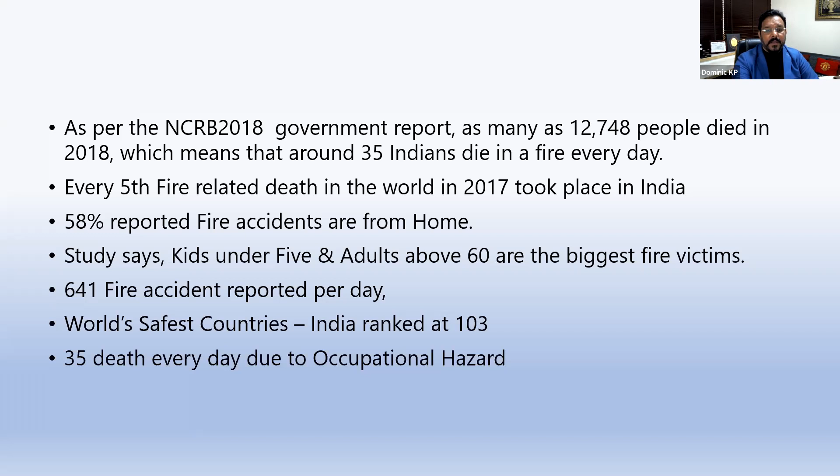If you see National Building Code 2016, Part 4, which talks about fire prevention, life safety, fire protection, it covers the requirement of fire prevention and life safety in relation to fire and fire protection of buildings. The code specifies occupancy-wise classification, construction aspects, egress requirements, and protection features necessary to minimize danger to life and property from fire. It specifies demarcations of fire zones, restrictions on construction of buildings in each fire zone, classifications of buildings based on occupancy, types of building construction according to fire resistance of the structure and non-structural components, and other restrictions and requirements necessary to minimize danger to life from fire, smoke, fumes, or panic before the building can be evacuated.

So today's subject is the importance of fire safety, passive fire protection. Unlike active types, passive fire protection systems never seek to extinguish the blaze. Instead, the passive fire protection role is to contain the fire to its point of origin and prevent the flame and smoke from spreading throughout the building. The National Building Code 2016 highlighted the use of and need for passive fire systems in buildings and structures.

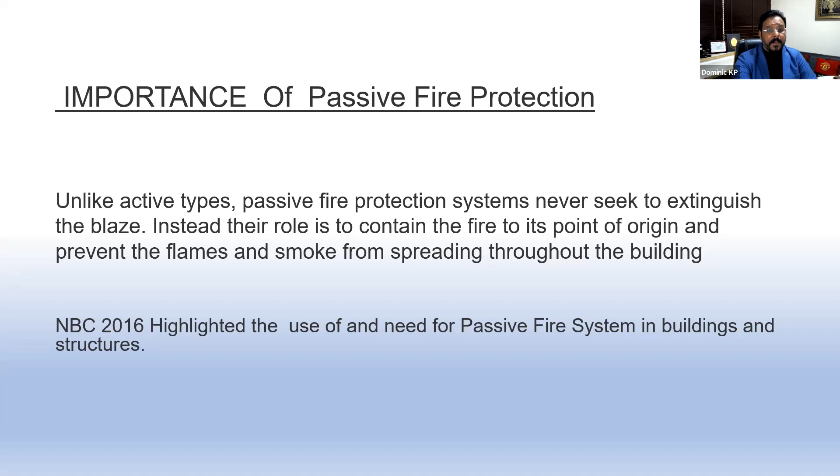As I said in the beginning, the topic for the day is Facades: implementing fire safety and performance on projects. This is presented by our good friend, an authority on the subject, Abhishek Chabra. Abhishek joined Thomas Bell Wright in 2013 and has been the driving force behind the expansion of fire compliance activities. He has been advocating the need for compliance to standards for improved safety and quality across industry for most of his 18 years of experience. He has vast experience of how conformity is realized across the supply chain of several industries, including consumer electronics, industrial, renewable, and building products. He has been writing various articles and presenting at various forums about how mandatory and voluntary quality and safety compliance are realized.

He also drives a blog and a LinkedIn group called Gurus of Testing, Inspection and Certification, www.tic.guru, aimed at expanding an understanding of conformity across the world. He is a member of IAS Technical Advisory Laboratory of UAE and also a code contributor for UAE Fire and Life Safety. Ladies and gentlemen, we have a very esteemed speaker with vast experience in writing codes and also ensuring compliance is made or met. I welcome Abhishek Chabra to speak on the subject, which is very passionate to him. Over to Abhishek.

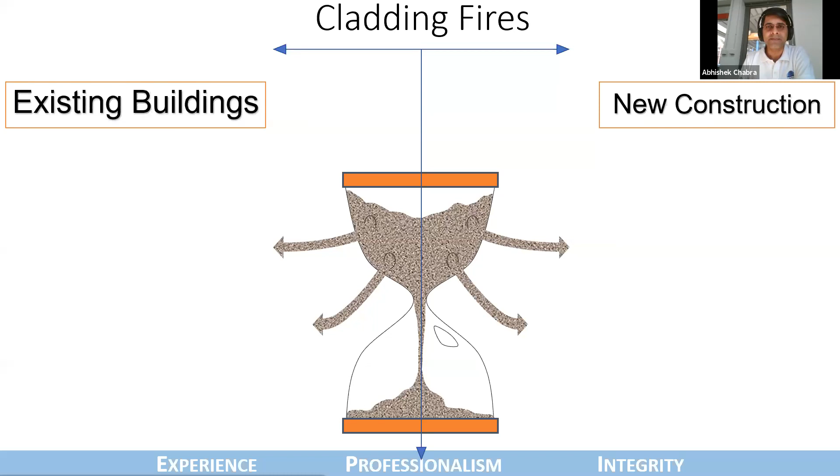So I'll give you a brief overview of how we as a company, and myself, contributed to this in many ways. I'll start by explaining that the NFPA, the National Fire Protection Association from the United States, has a research foundation that came up with a very interesting tool.

They wanted to develop a risk assessment tool that allows anyone in the whole world to assess the risk of their building. Anybody, from a facility manager to a building owner to an authority having jurisdiction, can use this free tool from the internet, input data about their building, and arrive at a risk rating with respect to facade fires. This tool, called the Effect tool, was developed by a company called Arup, supported by Jensen Hughes from the United States, as well as Thomas Bell Wright, who was the technical advisor for fire testing. We contributed massively to helping develop this tool, which is being used worldwide today, from the United States to Europe to the Middle East to Australia.

We also did a lot of work supporting authorities around us. We supported the development of the new revision of the UAE Fire and Life Safety Code of Practice, which brings together a very good set of requirements for several different facade types and cladding materials, an approach that has been lauded by Europe, the US, and people around the world.

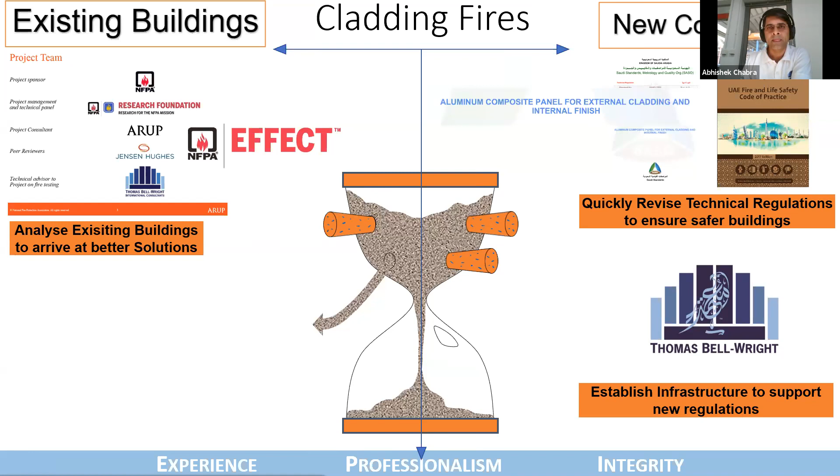For existing buildings, we went ahead and undertook a large R&D project. There is a company fairly well known in the world called Johnson Controls. They developed an extremely innovative, state-of-the-art solution to tackle the problem of fires on existing buildings - a system that proactively detects a fire on the exterior surface of a building and automatically uses an active fire suppression system to bring the fire under control.

People close to the subject of ACP fires or big facade fires know it is difficult for fire tenders and people trying to control a fire to reach the site, as the fire often engulfs buildings very quickly.

So in our laboratory, we built a 25 by 35 meter wall and added a range of combustible cladding material on it. As you can see on a small video snippet, this active fire suppression system is able to control these fires. We were very pivotal in helping Johnson Controls finalize their product, demonstrate and make it functional, and showcase to the whole world how this system works very well.

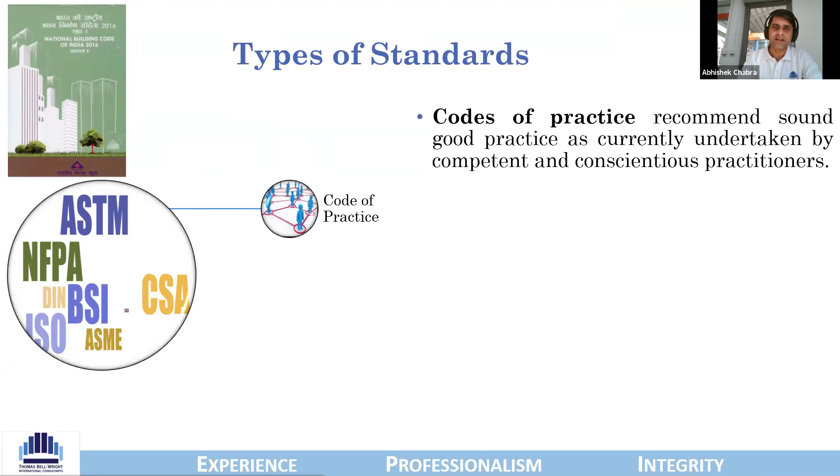How are these implemented across the world? We use another kind of standard called a method. An example is NFPA 285, published by the National Fire Protection Association, a standard test method for testing fire propagation characteristics of cladding materials. What are methods? These are highly prescriptive documents. They set out an agreed way of measuring, testing, or specifying what is reliably repeatable. The key word for test methods is repeatability. Unlike codes of practice, test methods have a prime goal of ensuring repeatability - a product brought to a laboratory, a specification written in a contract will trigger repeatability irrespective of the circumstances under which the test is done.

I then move to what is called guides. Some of you may have heard of ISO 17025, a standard used for setting the general requirements of competence for testing and calibration laboratories. These guides are published to give minimalistic, not very prescriptive advice which reflects current thinking and practice on how to do this effectively. As an example, ISO 17025 lays down minimum guideline methodologies, advising laboratories how to ensure that the tests conducted are repeatable or not.

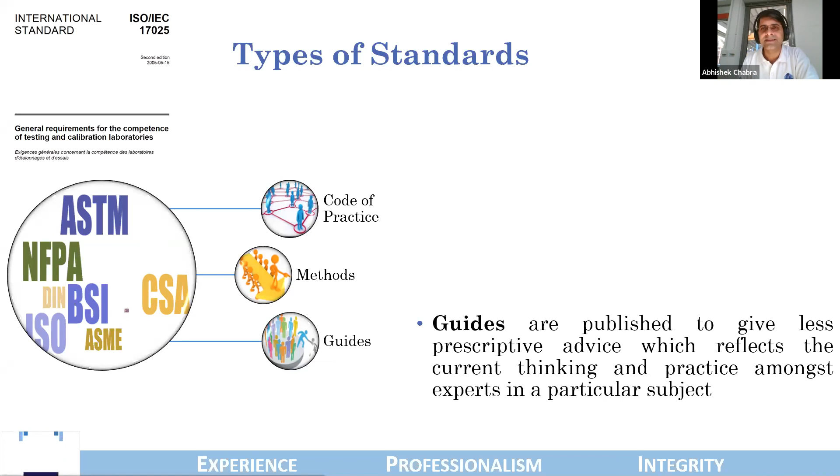With this as background, I'm sure you have a much better understanding of the intent and use of codes, methods, and guides. Let's look at the problem at hand: facade fires. I'm sure a lot of you have studied, read, and may already be aware of a good background of why these facade fires have been happening.

I'll give you a background again, just for the purpose of revision. Many decades ago, construction for what was called high-rise buildings, maybe 60, 70 years ago, was done using thick load-bearing walls. The floors were laid with support of these thick load-bearing walls, which ended up performing lots of functions. They not only supported the load of the floors but also acted as very good barriers between the outside and inside world. They provided thermal gaps, thermal breaks, weather resistance, water resistance, and even building movement. In that era, these thick walls were acoustically very good as well. If you've been to some really old buildings, forts, or palaces, you'd notice the interiors are often very cool, very contained, away from the outside world.

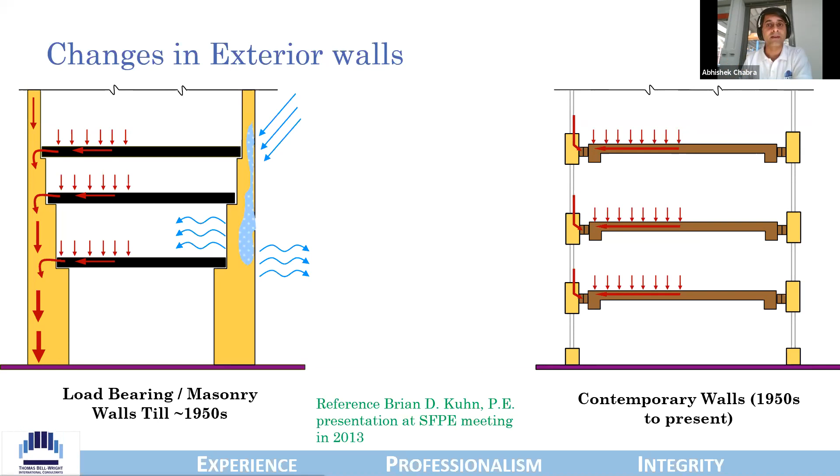But what were the functions of the big, thick load-bearing walls? These functions eventually got divided. Now designers, architects, engineers had to come up with a system that fulfilled all these functions, which were originally taken care of by one thick element. How do we fulfill all of these functions when we want to be fast, quick, and very cost effective?

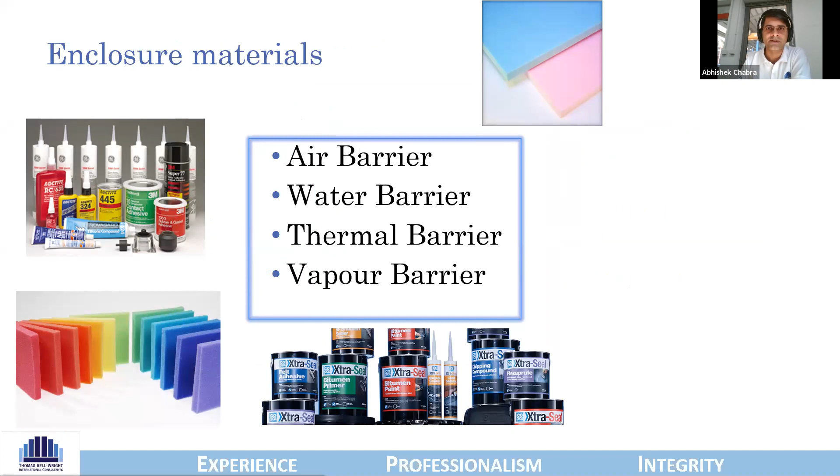Well, R&D, manufacturing facilities around the world, and the World Trade Organization allowed the supply chains to open up. Our country opened in 1993, and so many materials from all over the world could come in. Designers, subcontractors, facade consultants had the freedom to bring in materials from different parts and design and engineer a system that will fulfill the requirements of those thick load-bearing walls. Now there is flexibility, and you can almost engineer a specific solution with the help of materials from different places. Where is the risk then?

Well, the risk is very evident in the world we live in. What we see on our phones, in brochures, in advertisements - is this what you get? How often is this a real problem? What you see in front of you, as simple as going and buying paint, which when painted in your house, you say, well, maybe this is not how it was.

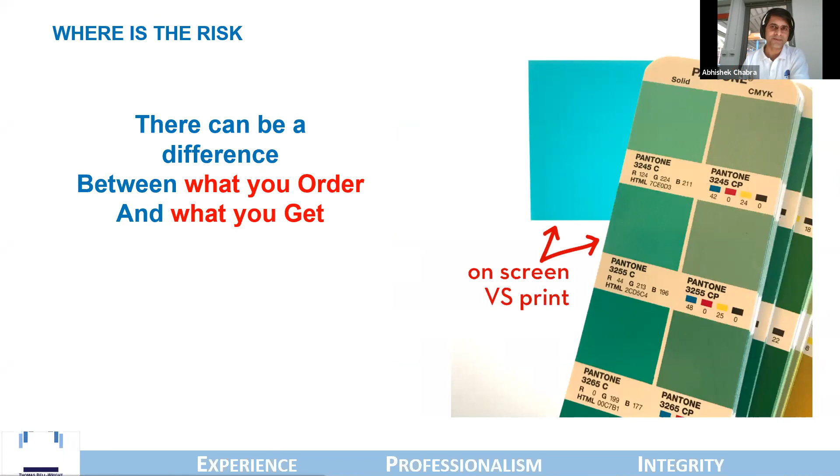So I want to check from you - I don't know how many of you have experienced something like this, where you order something and what you get is something else. In today's world, where a lot of shopping happens online through e-tailers, we buy things, and when they reach us, they might not necessarily look, feel, and perform the way they were supposed to.

This problem is dealt with very effectively in many types of consumer products, which you are probably very familiar with. So let me quickly open a small poll question to take your opinion on how you see and think these situations are handled.

Have any of you witnessed a product recall? I remember when I was in India many years ago, Nokia batteries were recalled, and it was probably one of the biggest product recalls I had witnessed in my life. What is the situation with you? I would love to hear.

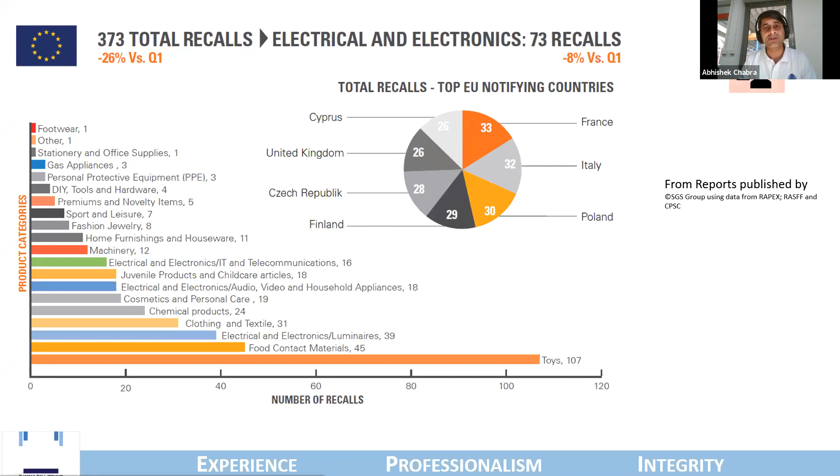So, as a lot of you understand product recalls, you have returned products, you know how product recalls really work. But how exactly does this concept of product recall work in the construction industry? I don't know if you have ever wondered or come to a situation where you realized the building that was constructed has some materials, some components, which have not only been procured but also installed. What do you do now? How does the government help? Does the government help? Who can help?

Very sadly, the repercussions are very bad and often outside the control of the stakeholders, if you are procuring, buying, or renting an office. The people who were involved in designing and constructing the office are very far away. Accidents, damages, fires, claims, fines, reputation damage - the list is extremely long.

I would not delve a lot into this, we are familiar with this. There are people from the insurance industry who are also listening in, and many of you are aware of these repercussions. Today I'm going to talk about some simple and very easily implementable methodologies - things that once you learn, you can ensure that as a stakeholder, fire safety issues and potential damages in existing or new buildings do not happen.

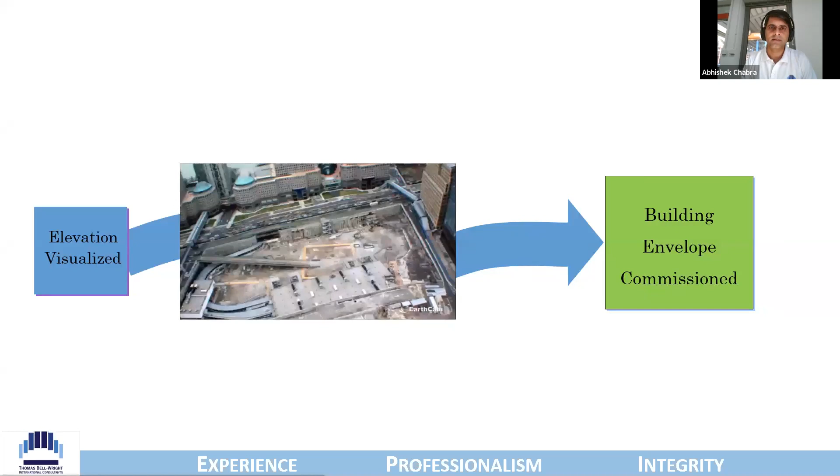So let's talk about 4 very key steps that are undertaken from the time that the elevation gets visualized in the office of an architect till the time that the building envelope is actually fully commissioned.

It starts with selection of materials, and a key part of selection of materials is to know, write, and ensure what are the fire properties of materials that will be used to design a facade system or a cladding system. And this takes me to a very important aspect, often known in some circles - what is the resultant property of a facade system.

The property of a material behavior and a system behavior is often very different. When 15 different materials are brought together in a defined configuration, their system behavior as a whole is often very different from the constituent elements.

How they would behave when it comes to fire is something that needs to be tested and validated - tests which check how the reaction to fire behavior of one material interacts with the reaction to fire property of the material adjacent to it. Is there a material that may take a very short time to ignite quickly, may not have enough energy to burn, but just enough to ignite the adjacent material, which was very difficult to ignite, had a high ignition temperature, came across as very safe? But when the second material gets ignited, there is potentially a catastrophe that can happen.

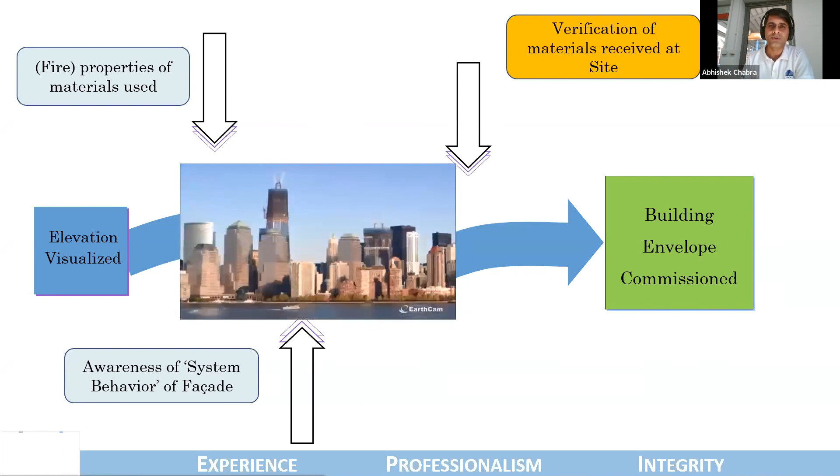So not only do you need to validate the design and behavior of the cumulative system, you need to check and ensure what materials are being delivered to the construction site. You could have chosen great material, you could have done a good validation of design, but wait a minute - what is happening at the construction site?

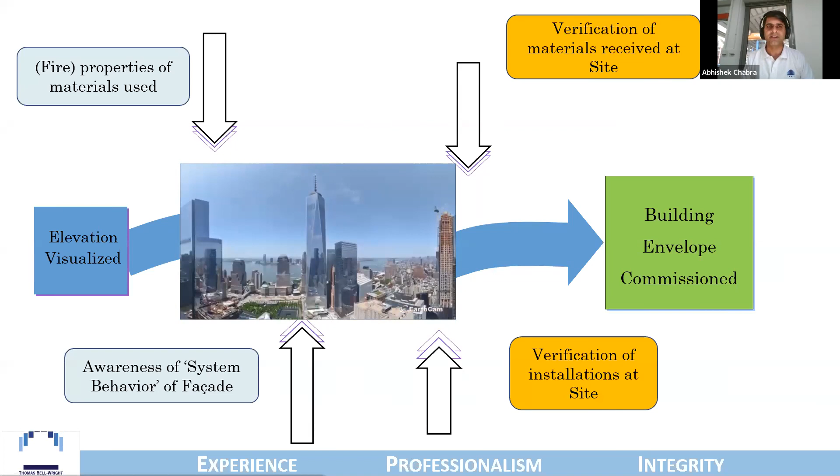How do you check and ensure that the materials are the same as they were declared to be in the first place? And once you do get assurance of these materials, you need a very stringent watch on ensuring that the materials that came in are getting installed in the same way as the approved system - the design which was validated, and lots and lots of money was spent to ensure that this validation is in place. So let's start with the building blocks.

A lot of you would have seen test reports, and probably already rely heavily on a manufacturer submitting a test report saying my product is fire safe. I'm going to talk a little more about what this fire safe can potentially mean. What is fire resistance? What is retardant? Ignitability? There are so many properties that often get thrown around based on what - fire test reports.

What are these fire test reports? And the most important part - how do you establish a link between a test report that is submitted as part of, let's say, a project submittal or a brochure, and how that links with the material that eventually reaches the site in a packaged container?

How many tests were done before getting that test report that was given to you and submitted? How were these tests done? In what kind of laboratory? Were there several failures behind it? Was the laboratory capable of doing these tests? How do you validate this laboratory? And my favorite question, so many people ask me this: Abhishek, I have a test report and it is valid for 3 years, and it is the 4th year today - can I still use this test report?

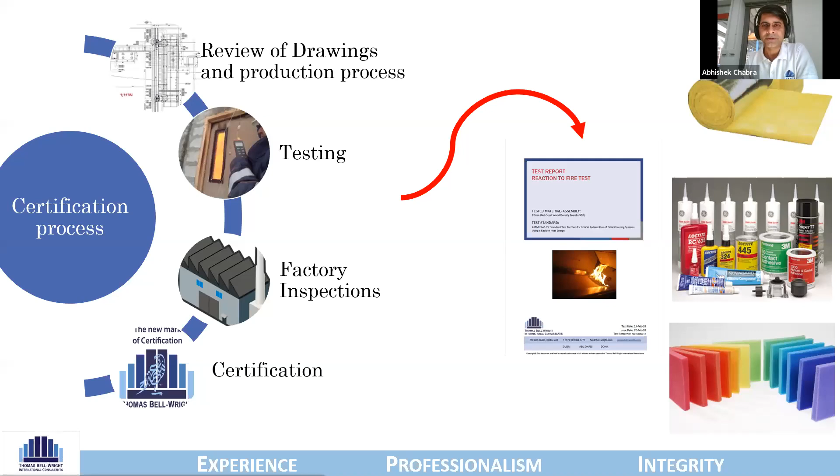And hence, such manufacturers will put not only the certification mark of a third-party certification body, they will give you a certification number, which you as a buyer, specifier, or approver can actually validate. You can go online to the certification body's website, punch in either the name, the number, or the test method of the product, and verify if the certificate is valid, where it was issued from, and what test methods the products comply to. These listings capture a lot of details for buyers, specifiers, insurers, contractors, and consultants to validate all these properties.

As an example, you see a fire door, which gets tested for fire resistance. The certificate and the listing document will give you enough and more evidence to check at the construction site whether this is the same product which was printed in the brochure or submitted as part of the specification document.

And this brings me to a subject very related to facade systems and materials, which is the key difference between a product test and a system test. What is a product test? A product test is a test of reaction to fire properties or any properties of how a product, for example insulation material, ACP, cladding material, rock wool, foams, sealants, behaves. There are a plethora of items or materials which have their independent material properties.

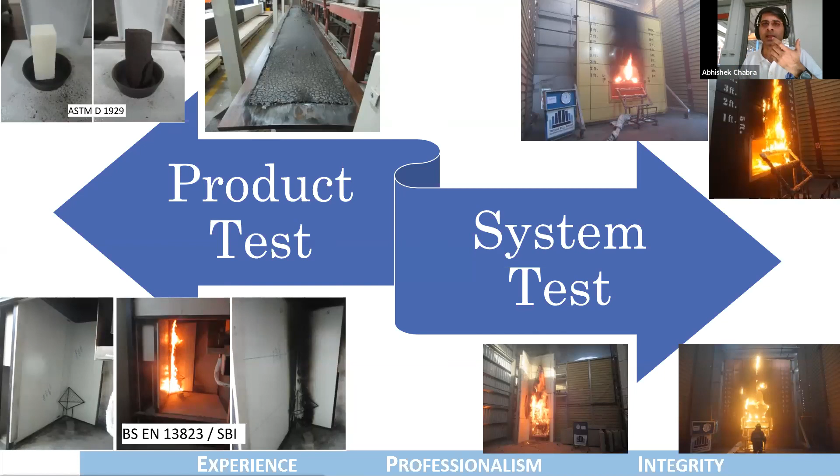When they are brought together with defined dimensions, thicknesses, and sometimes air gaps as well. Let me quickly show you that when you see these certificates submitted to you as part of submission documents, how do you really validate these certificates? I'll show you with an example that you can see on your screen.

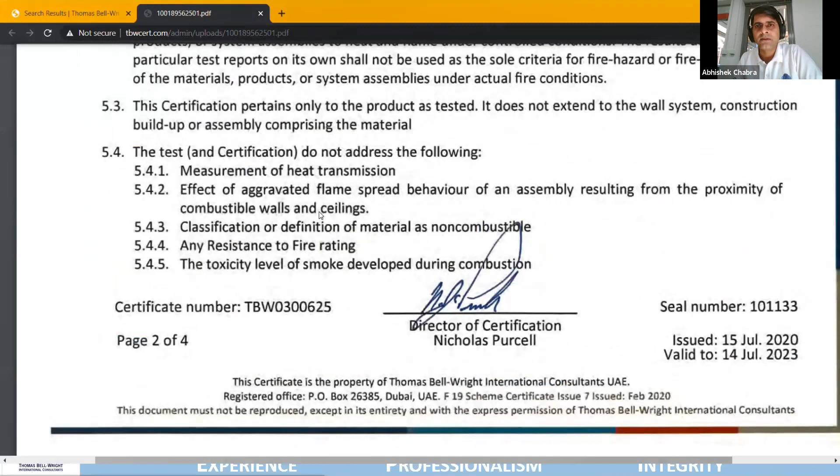This is an example of a certificate issued to an aluminum composite manufacturer in India. You probably are familiar with the name of this company. On the screen you would see this certificate, which all of you can look up on the certification directory of our company, www.tbwcert.com. This certification directory details a lot of information which you can use not only to verify that the specifications you are using are correct, but also the address from which this certificate is coming.

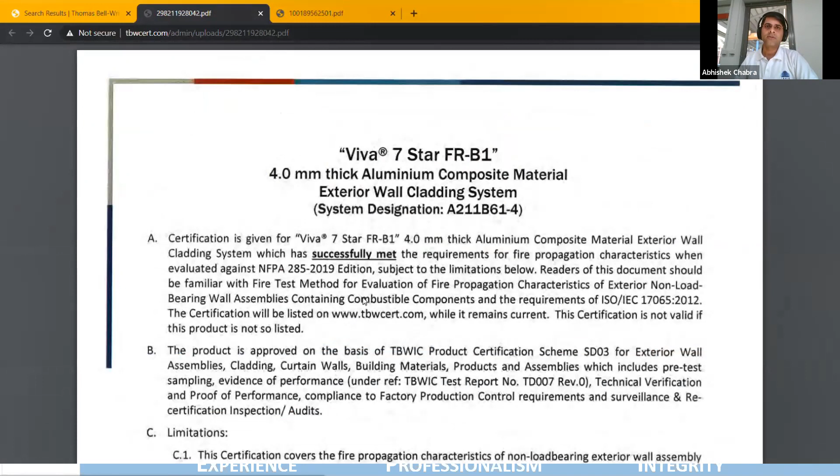And here you now see the listing of a system test, like the NFPA 285, which I will detail later. Such a system test listing will have a lot of information defining the design of the system. It will list down all the other components of other manufacturers, how they were brought together, what were the details of the design, what were the air gaps that you see.

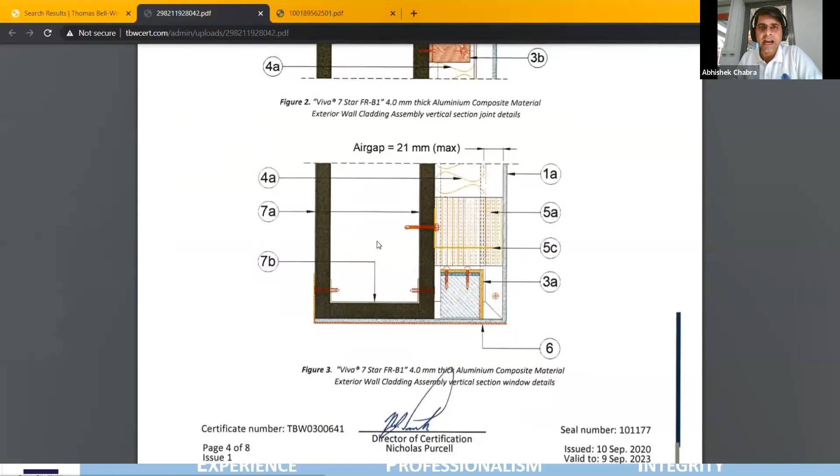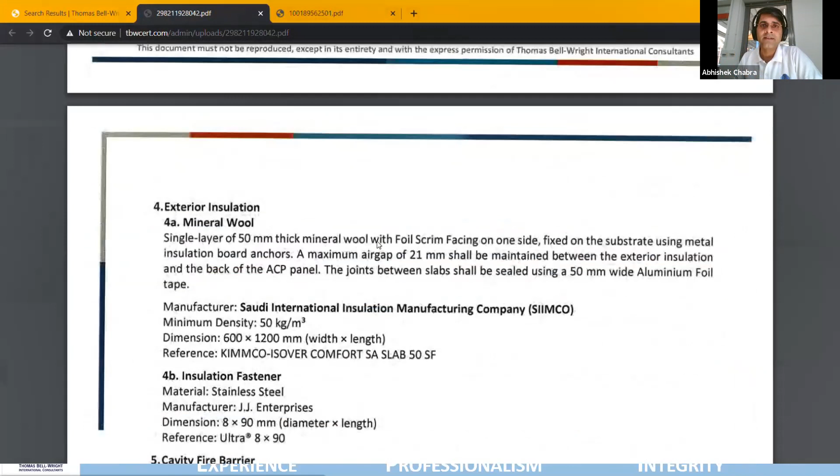And all this information is extremely important for you as someone who is designing another system for a building which you will be using. You could be validating the submission of a product manufacturer who claims that his material is fire safe.

It is very, very important to know that if a given material manufacturer, like an aluminum composite panel manufacturer, has done a large scale test to prove or to have evidence that his, let's say, ACP will not go up in flames like some of the videos that you may have seen, this is the test.

Well, yes and no, because you need to know and understand how that aluminum composite panel was designed into a solution and installed. Were there lots of other design features to ensure that the oxygen gets limited to the fire that can potentially grow? What were the air gaps? What were the fire breaks? There are a large number of design elements to ensure that the system behaves in a given way.

From the hundreds of large-scale fire propagation tests that we have done in our laboratory over the years, we have seen materials which could be classified as per the European norms as class B1, even B2, have actually complied with a large-scale fire propagation test. And on the other hand, we have seen materials often referred to as per a classification method as A2, in terms of limited combustibility, could be part of a cladding system that actually catches a big fire.

Let me take you all to our laboratory here in Dubai and show you with the help of a quick video how these large scale fire propagation tests look. You can see on your screen this large 25 by 35 meter wall that I was talking about in some of the initial slides.

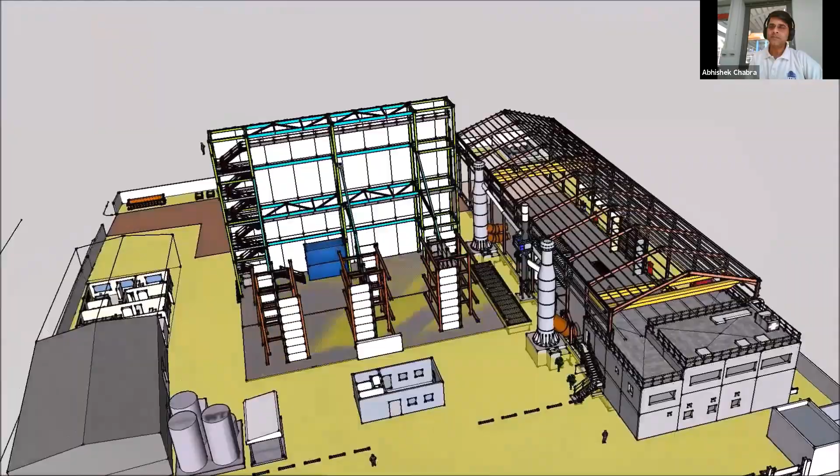I will shift to SketchUp because our drone photographer did not get the license to do a lot of drone photography, but I will switch to SketchUp to show you our laboratory where we do these tests. On your screen, as the video moves, you can see the place where we do these large scale fire propagation tests.

On your left, you see the test rigs as per the British standard, the BS 8414, the test method that has been talked about a lot through the course of the Grenfell investigation.

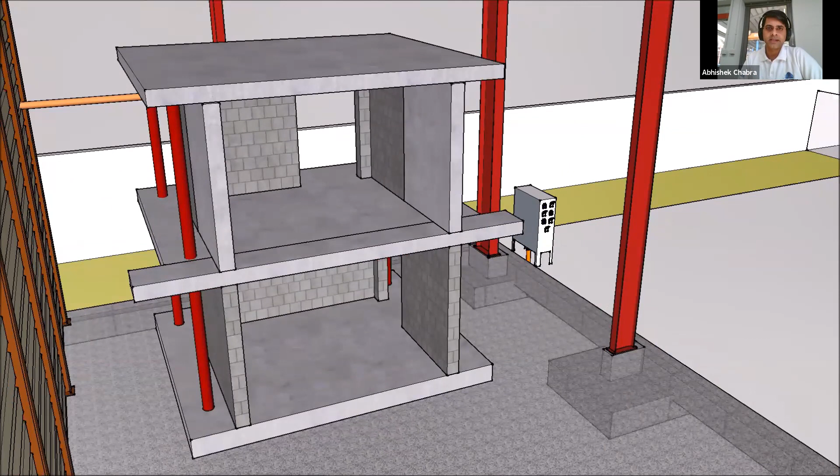Here at the center of your screen, you see the test rig used to conduct the large scale fire propagation tests as per the American standard, the NFPA 285, also called ISMA, the intermediate scale multi-story test apparatus. Let's look at how these tests are performed.

A subcontractor will come in and build a mock-up replicating the design of the project, exactly replicating how the exterior facade material, like the ACP, my favorite example, and insulation material, fire breaks, gaps, supporting installation material like gaskets and fasteners. What are the types of fasteners? What are the air gaps? All these details are replicated.

The NFPA 285 test goes to great lengths to explain that the joints, which can come between, let's say, two aluminum composite panels, should be above the window header. The window header is a place which, as you can see on the screen, replicates a window that is either in an existing building or a window that can develop in case there is a building fire.

You could have a situation where you don't have any windows in a high-rise tower, but due to a fire that has broken out, due to the hot gases, you could have a break, a place where hot gases burst out and create the often discussed leapfrog effect. What the window burner does is replicate how the leapfrog effect, or how the escaping hot gases or fire, will interact with the whole buildup of the facade.

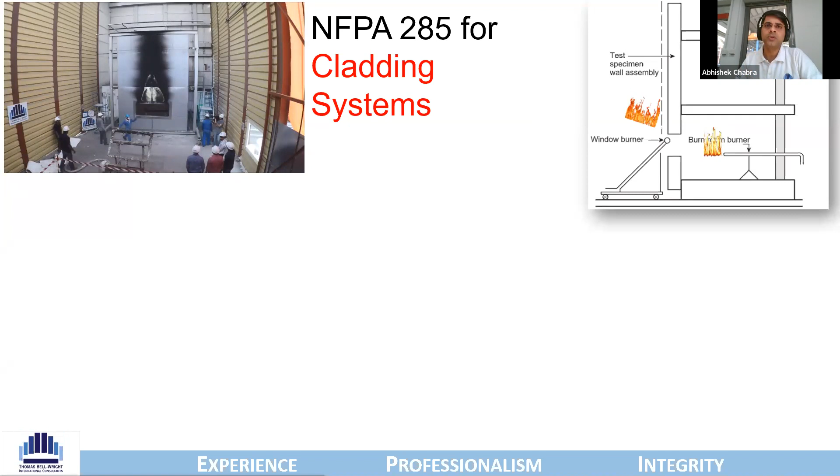These gases would go in between the air gaps as well as attack the exterior face of the system. Hence, only a given design, one specific configuration, gets tested and validated through this large-scale fire propagation test.

You have an L-shaped window, which means you have an L-shaped mock-up, which means there is a reflection of heat and flux that comes across because of how the fire can potentially grow. The British 8414 test is done in two configurations, part 1 and part 2, depending on the type of subframe and structure. Of course, this is a subject which I love, and I can probably speak for an extremely long time.

Detailing how these large-scale fire propagation tests replicate only a given set of situations or scenarios of a project. This is where, as I said, we need to go back and assess and ensure that a given building could have so many different types of drawings and designs. So let us understand, with this overview, how you can help.

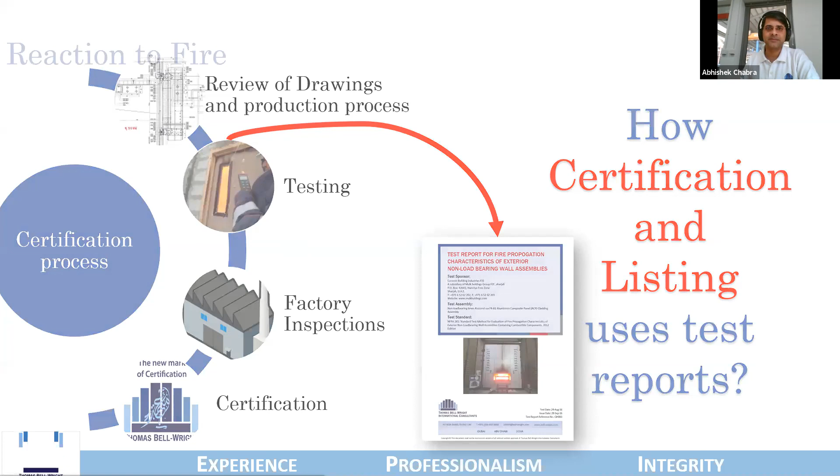What are these tests? For facade materials, the 4 key properties of reaction to fire must be kept in mind when choosing materials that will come together, behave, and perform as a system bringing about all those properties that a thick load-bearing wall used to provide 60, 70 years ago, and probably much more.

First is ignitability. We all know things catch fire, lots of things catch fire. But what is the temperature, what is the environment in which a material will catch fire? And this may not always be very, very risky.

If you imagine around your table, you can see paper and maybe a plastic bottle. You will be sure to answer that paper will catch fire more quickly than plastic, which means plastic and paper have different ignitabilities. But are both of them equally unsafe? A small piece of paper could burn very quickly and go away, but a similar size plastic material, depending on the type, could take a little longer to catch fire.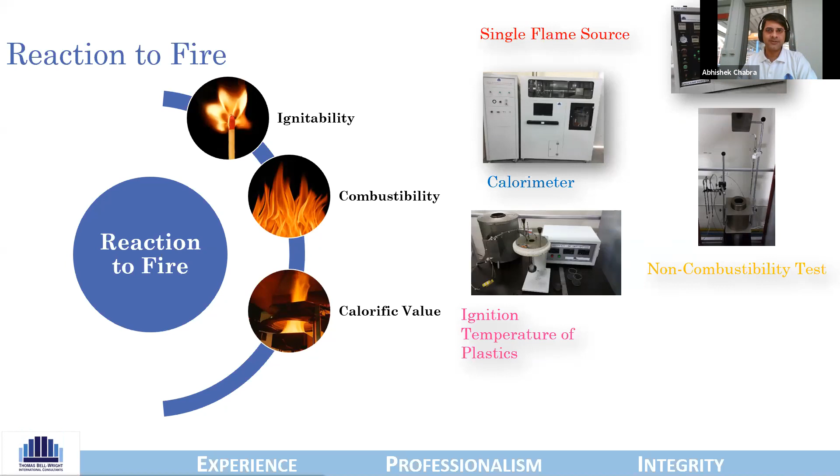The calorific value, very simply put, as we all know in India, whoever is eating sweets like I am, I love to eat sweets, the season is coming. Whatever has more sugar, whatever has more calories, is probably more harmful, right? So there are some building materials which have a higher calorific value, meaning these materials have more to burn.

How does this relate to materials we use in an everyday scenario? The amount of these high calorific value components as part of the material will define how quickly a flame will spread across it. Simply put, easy to remember: how much sugar does your burfi have? It means how much sugar, and how the subcomponents or chemicals with the capability to burn higher, are spread across the material.

This will define the behavior of the building material, whether you're talking of a board, a magnesium board or gypsum board, or an aluminum composite panel with a core material unique to each manufacturer's chemical formula. What is the calorific value? What is the combustibility? What is the flame spread? Whether this catches fire quickly or not.

The industry and manufacturers will often throw you an extremely large number of data points. The European norms, in my opinion, having done so many tests as per American, British, and European standards, has evolved a very effective classification method, also used in the UAE Fire and Life Safety Code of Practice, and the code Saudi Arabian Standard Organization has published for ACP. This classification method classifies material, as you can see on your screen, as non-combustible or nearly combustible, A1, A2, and then from B to F, classifying how quickly materials can catch fire.

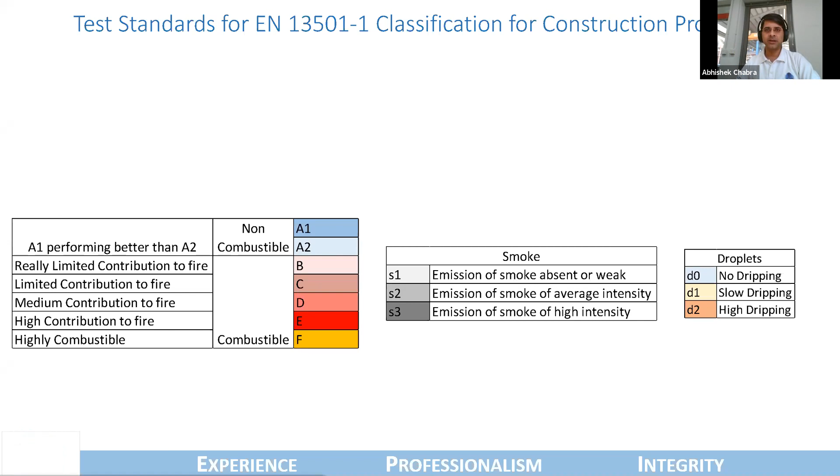Some plastics drip down when they burn, and some drip down while burning, which means carrying the fire. There are four different test methods: EN ISO 1182, ISO 1716, EN 13823, and ISO 11925. These are all different test methods which test a given material and classify it accordingly.

While a lot of people may think that the European norm EN 13501-1 is a test method, it is not. It is a classification method which arrives at a table using data from a lot of tests. How these tests are conducted varies depending on whether the material is homogeneous or non-homogeneous, what the substantial layer is, and how much of it there is. The number of tests that need to be performed can vary.

A typical example is the aluminum composite panel. Known to many, an aluminum composite panel not only has the aluminum skin and a color or coating on top of it, but also an adhesive between the aluminum skins and the polyethylene or some other kind of core. Hence there are several materials that need to be tested separately: the glue and adhesive separately, the core separately. A slew of tests needs to be done before someone can classify a simple material like an aluminum composite panel and say whether it is combustible or not.

As I mentioned, a test report should not be taken at face value. You must validate and confirm the certification and listing, because this certification and listing gives you all the data you need to make sure the decision you are undertaking is right or not — under what combination and in what circumstances these materials have been tested, and in what designs.

I would again bring your attention to the guideline document ISO 17065. This document defines how certification bodies certify products. You could have a manufacturer whose certification is conducted without any sampling — just a test report submitted with no traceability of how the product was actually made, or where, and a certificate is issued. So make sure that if you're using a certification body, it has proven capability of being able to do what it claims it is doing.

As explained in the earlier example, it is important to know that a facade system is an engineered solution. Assembly tests need to be done to check the resultant behavior, and these assembly tests need not always be about fire properties. There are many other properties that need to be fulfilled and demonstrated by exterior cladding facade systems. Just think back to the big, thick load-bearing walls of palaces built 80 or 100 years ago — all they had to do was make sure wind and water didn't ingress inside the building. Acoustic, weather, and a plethora of other properties actually need to be validated in projects here and everywhere else in the world. We could talk about impact tests, pull-out tests, and the list goes on.

Since climatic conditions in India and many other parts of the world vary a lot, we also do what is called thermal cycling tests, which validate that the gaskets and materials that expand and contract behave properly when weathered. Thermal cycling can be done in the laboratory. So many things can go wrong. Many of you may have seen, if you live in big high-rise buildings without windows — these closed buildings — that ventilation and air-water infiltration can wreak havoc.

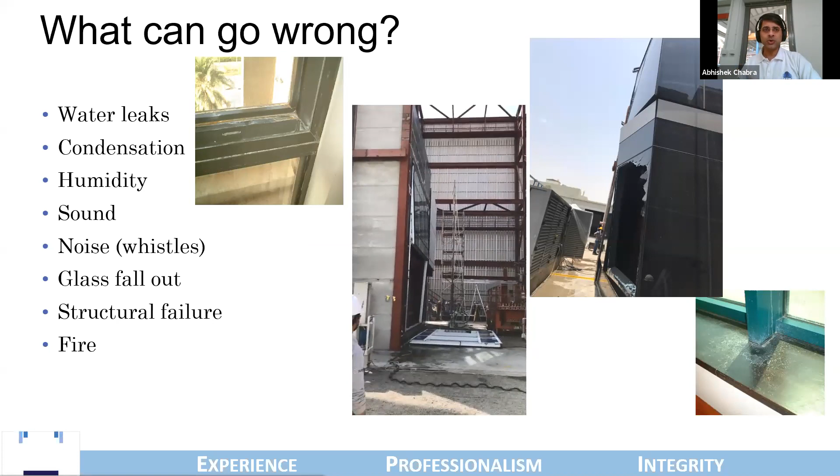You could have water coming inside the building, inside a compound. If you have a mall or an airport or a shop where water comes inside, or the windows break down just because of wind pressure, things can really go wrong. Let me show you a quick video of another NFPA 285 test done to bring out the fact that the design and the implementation of the design is very important — and something very bad can also happen in a test.

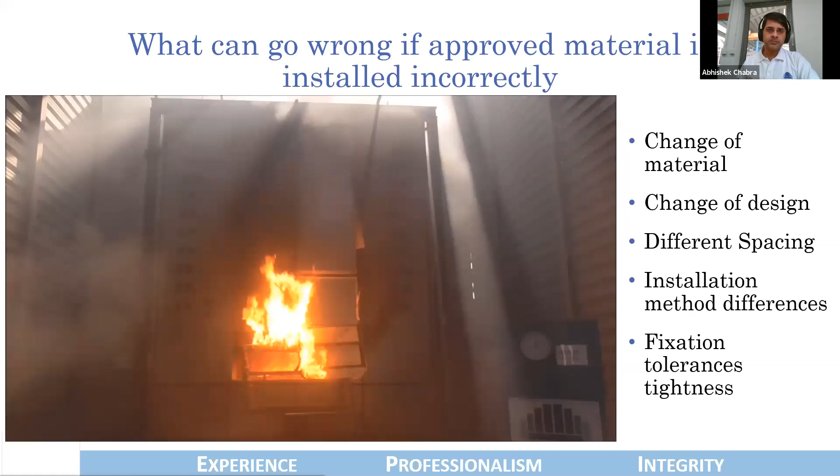So how do you actually check and ensure with the help of an inspection that what you have procured, what you have ordered, what you have specified is something that is really coming to the site? Going back to the guides, there is a guideline document published called 17020. This document defines how inspection bodies can verify and demonstrate that the inspectors they have on board are qualified to inspect what we are talking of.

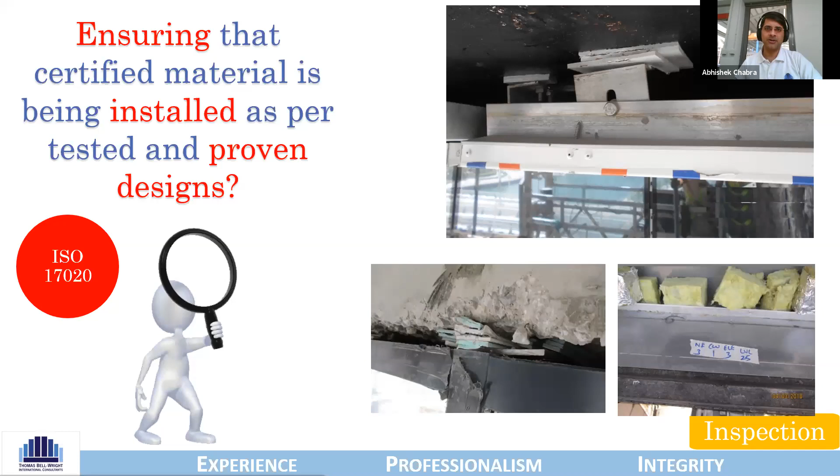I will show you another example on your screen of how an aluminum composite panel manufacturer supplying ACP to the construction site will demonstrate this repeatability. If you see on the right of the screen, on the back of the aluminum composite panel, where the protective sheet does not remain, you would notice that there is a sticker that runs.

This sticker will have a number. This number can be validated on the certification directory of the certification body. And how this can be done is very simple. I'll show you another video.

You just turn back to the ACP sheet. You can see these numbers. Once you see these numbers, all you need to do is punch them into the certification body's online directory. Every certification body needs to have an online directory. If someone claims to have a certificate which does not have online access, it is something you need to be very careful about.

Before I come to an end, let me do a quick summary of how all of you can ensure that there is a fire-safe cladding system. You begin with doing a risk assessment. Facade designers, architects, subcontractors, all the people in the system need to ensure that you choose the right materials as per the correct properties.

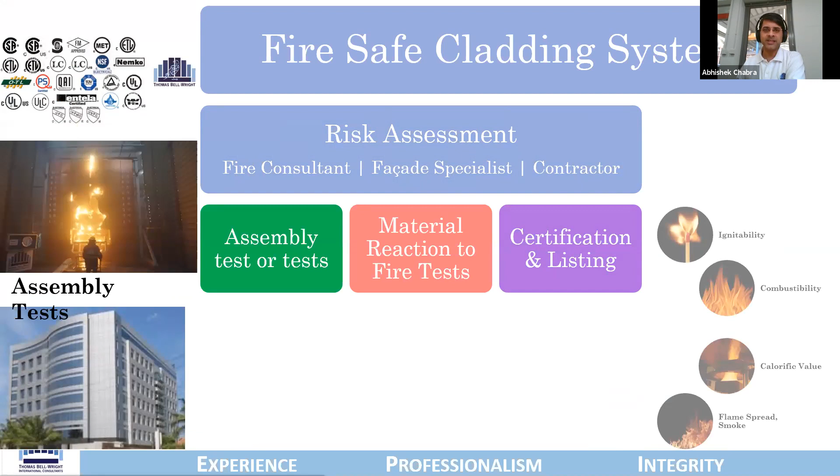Ensure that you have a certification and listing so that this can be used at the construction site to verify that the materials brought in were right. Validate that the designs have been validated through large-scale fire propagation tests, and ensure that you have a qualified inspection body.

That brings me to an end of my presentation today, and it is up to all of you as different stakeholders to make sure that you do your stuff right and do not have a big cladding fire.

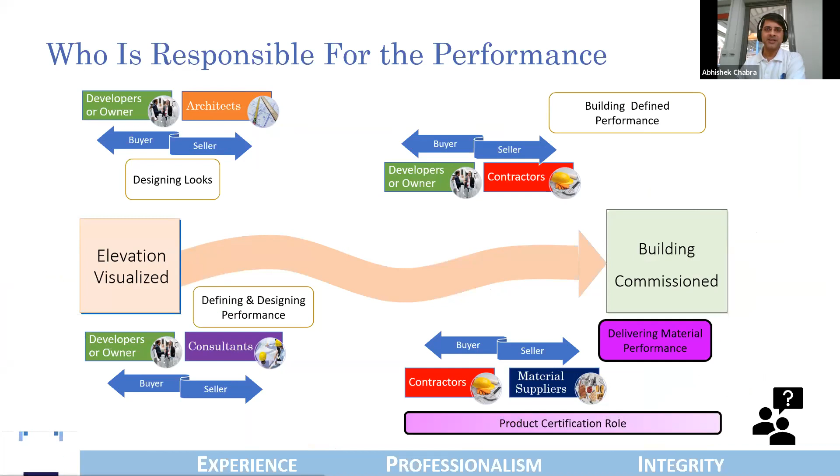I will now go through the list of questions that have been coming and can start addressing them.

Oh, thank you, Abhishek. It was a wonderful session, very detailed. I think all the audience participants would have seen the difference in the past webinars, and Abhishek's webinar is very clear and to the point when it comes to the testing of material and the material that goes into passive fire protection.

And we have good participants. We have around 290 participants so far, and we have got some 9 questions to ask today. So I will begin with the question from Manish Khandelwal. He's asking, 3 meter by 4 meter wooden fire test, possible in your lab?

Absolutely, absolutely. This is a test which is very possible, though I am not very clear, Manish, what kind of test you're talking of - if you're talking of this test to be a cladding test, or what exactly are you trying to burn. I will just clarify to you and to everybody the kind of tests that we do in our facility.

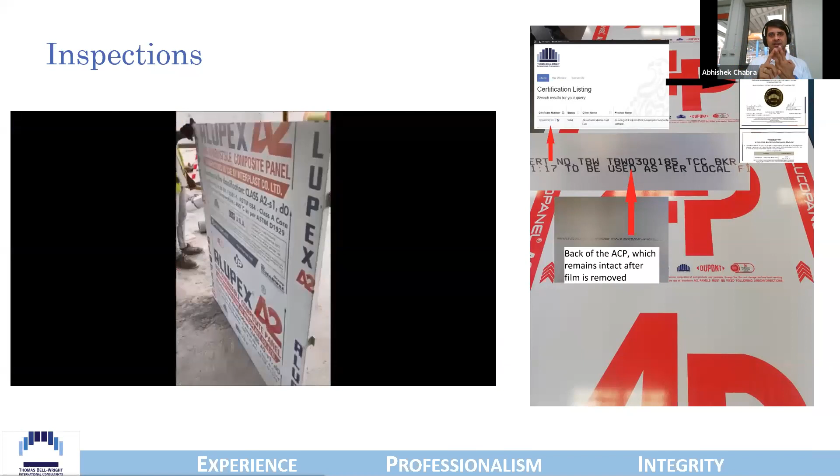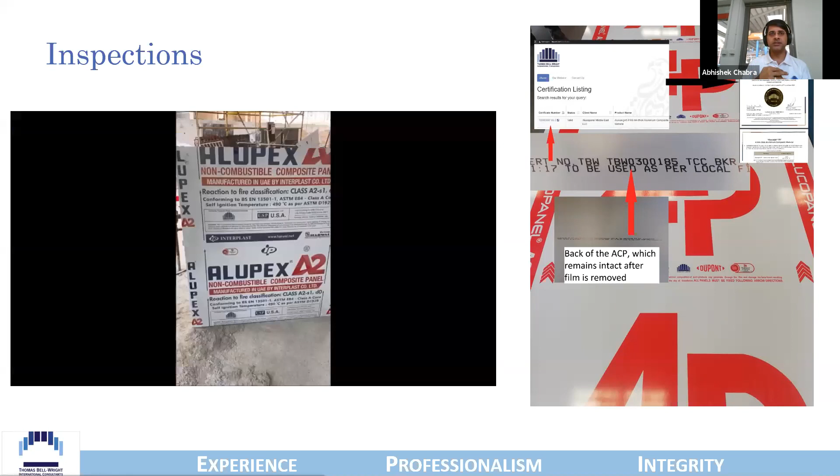This is the tool which you as a contractor, as a consultant, or as an authority having jurisdiction like the fire department or airport authorities - whoever has been made responsible to check these things - will need to go and verify, at least for products like these. So as an example, if you have a smoke detector or alarm system critical to life safety, if it does not work when there is a fire, why is the whole thing in place? So you need to check that these are certified and listed. Look up the certification number on the product, and it always will be there.

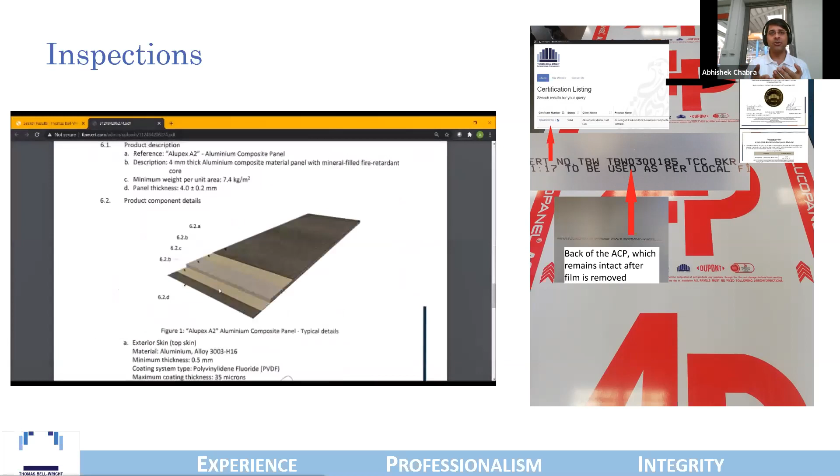And if it is not, that means it is not a certified product. It means you have no third-party assurance mechanism in place to make sure that what the manufacturer is claiming, or what the trader or supplier is claiming, is true or not.

Naganathan, the question is the same: what is the link to check the test report online? I think you answered that question previously, so I don't need to revisit. Yes, or I have written the link on the chat window as well.

Manish Khandelwal asks again about a 2-hour wooden fire rated door with EI 120 minutes with a 300 by 600 vision panel. So he's given the size of that door. So is what he's asking, whether you do the test for that.

So Manish, yes, we of course do the test for this, and I'm trying to correlate another message that you have written on the Q&A saying UL10C or the BS476. Probably, and this is my guess, you could clarify, what you're asking is that if you want to validate an EI 2-hour fire rated door with a vision panel of 300 by 600, whether you should use a UL test or a BS test.